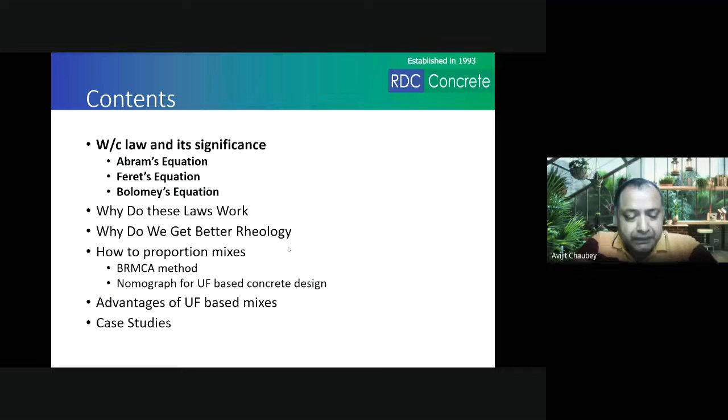Then why do we get better rheology with ultrafines? When we use ultrafine, why do we get better workability, lesser stickiness, a lower viscosity? And then how to proportion concrete mixes with ultrafine?

Of course, there is the IS method, there is the ACI method, but they have got limitations. Right now, the IS code or ACI method of mix design does not give a good and reliable method of designing a concrete mix with ultrafine minerals. So we will try to see what are the things to work around for proportioning concrete with ultrafine minerals.

Then we'll talk about the ultrafine based mixes advantages, and we'll see the real life case studies, where ultrafine material has been used to a very good advantage.

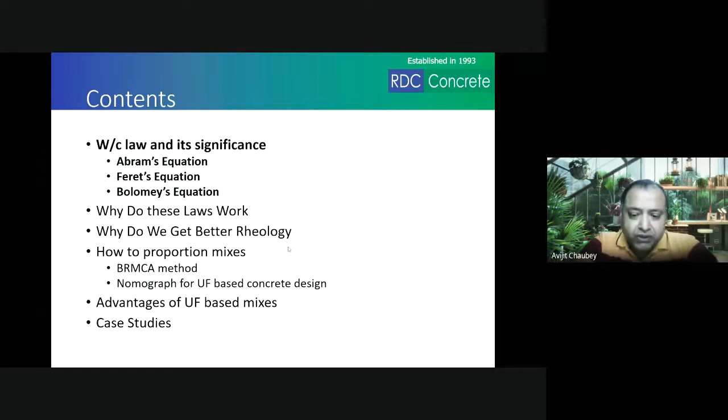So let us start with the water cement ratio law. In the year 1919, Duff Abrams, an American guy, did a lot of work. There were a lot of inputs. The strength was the output, and they tried to find out how to increase the strength, and through a lot of research he came across this relation that the strength of concrete is inversely proportional to water cement ratio.

Now, many people till today feel that the strength of concrete is dependent on the cement content - the more the cement content, the higher the strength. But in the year 1919, there was this person who focused on the strength of concrete, and he tested the strength of concrete by varying all the possible variables. And he said the only thing that affects the strength of concrete is the water cement ratio.

Believe me, I have tried to actually challenge this law. I have tried to change the aggregate proportions, because some people say that increasing 20 aggregate, you will get higher strength. Some people say if you increase 10 you get higher strength. Some people talk about other things. So I have personally tried to check whether this is actually universally applicable, and till today I have not been able to overcome this equation. Every time I end up getting that the highest significant factor for strength is the water cement ratio.

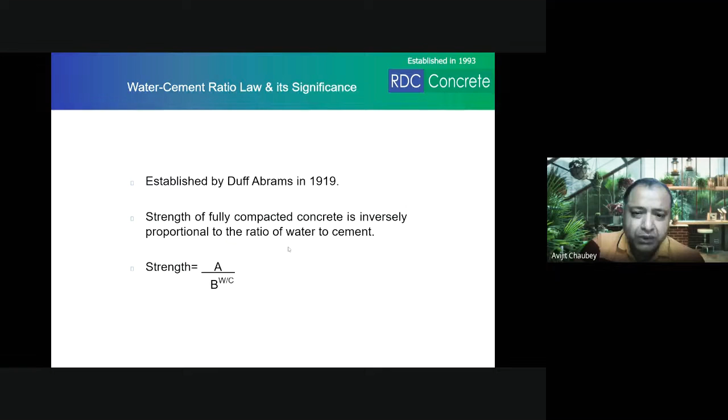They all did their work on gut feeling. There are cases where bridge construction used to happen in US and UK, and they never designed the structures. If you see traditional engineering, there was no calculation. People used to just start constructing buildings block after block, and the building used to stand, or else it used to fall down. American and British engineers were able to make very good, very strong structures, which are still standing today, without any calculation. It was just based on thumb rules and a very huge factor of safety. That is how it happened.

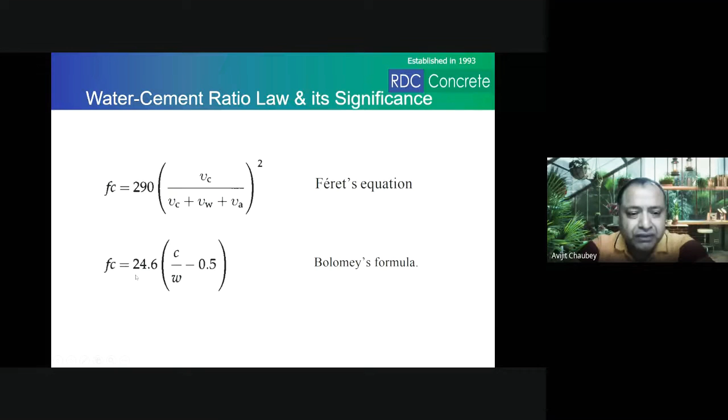He plotted the equation as per Féret's formula, Bolomey's formula, and Abrams formula for the same set of water cement ratio or mixes and their strength. All these equations actually fit the curve very well. The only thing he did was change these numbers to fit the equation as per his data, and that's how he did the curve fitting. Just by calibrating these numbers slightly, he was able to fit the curve, and it gives a very good data fitting, no matter which equation you follow.

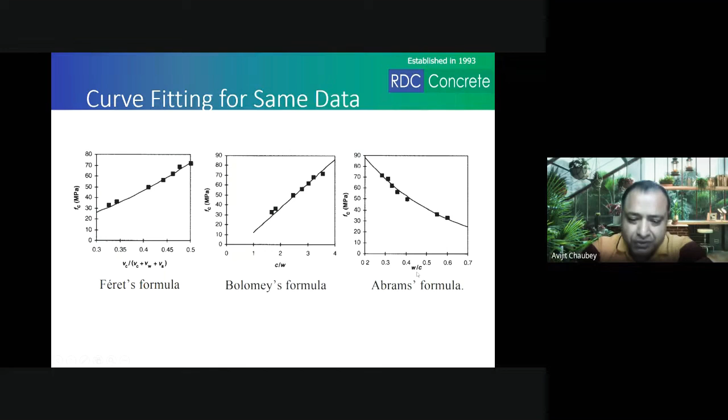Now, why do these laws work? Just excuse me a moment, please. I need to take this call. It's okay, fine. Thank you.

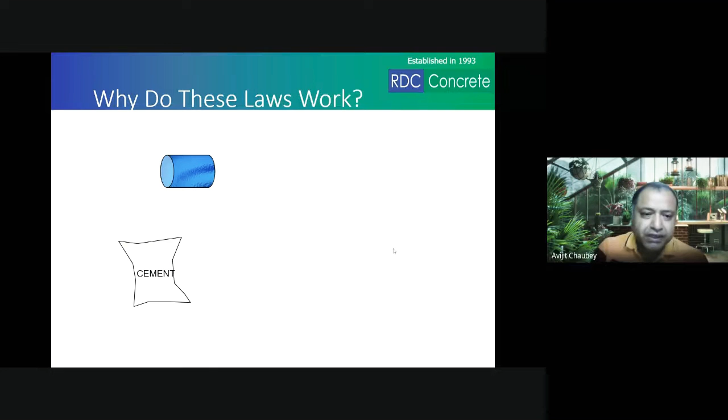So why do these laws work? As humans, we follow the law because the law is made that way. But in the world of science, it happens the other way around - the laws work because the materials behave that way. Let's see why. Say you have some clay, and you mix water into the clay to make a slurry or paste, and you get a cube made out of that clay.

Then you take a similar kind of clay with the same amount of water, but you add in more water. Similarly, in a third case, you add even more water to the same clay. Visually, the difference between these three pastes would be that the third one, with very high water content, would be lighter and less dense in color. The first one would be much darker.

Once this clay paste dries up and starts developing strength, it will show that the first mix is stiffer and the third mix is weaker, because the water molecules between the clay particles evaporate during hardening. These clay particles adjust themselves to incorporate the water particles amongst them, and you get a very porous structure where the water evaporates.

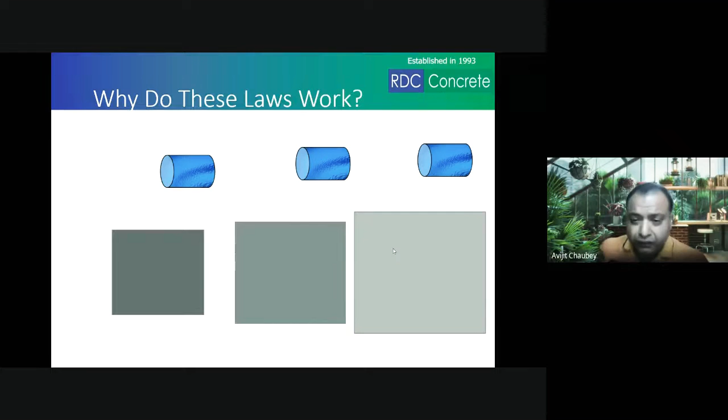Mathematically, per unit volume of all three materials, the water content would be highest in number three, and the clay or strength-giving solid material would be lowest in number three. The exact opposite would be number one, where the clay content is highest and water content is lowest. So this would be a stiffer mix, and when it dries up, it gives a higher strength.

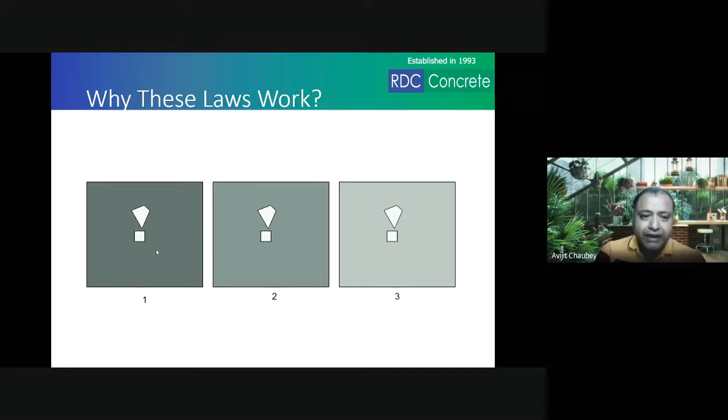Now when you add stone pieces into it - stone being aggregate, and we know aggregates are much stronger than any clay paste - when I add the same proportion of aggregate into all three clay and water mixtures, I would not get the same strength even though I'm putting the same stronger material in all three. The reason is the strength of a composite material is the strength of the weakest material inside it. Even though the first paste was strongest, and even after adding a much stronger material into it, the strength of the composite mixture still depends on the weakest material inside it, and that is the clay.

Hold on, please. Hello, boss. I am in a meeting. Can I call you after some time, please? It will take me 1 hour. Yeah, I'm sorry.

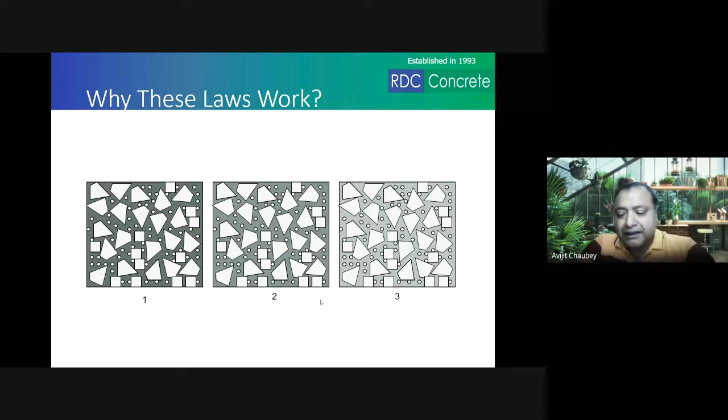So don't expect that you will get a strength higher than 100 MPa with the same materials that you are using. Now there is some other research also that has been done, and this photo is a very interesting one.

Now this test is a nano indentation test, and in a nano indentation test, they measure the strength of that material at a small point. It's a needle with a very small diameter, actually triangular in shape. What they do is prick this at different points inside the concrete and measure the strength of those points.

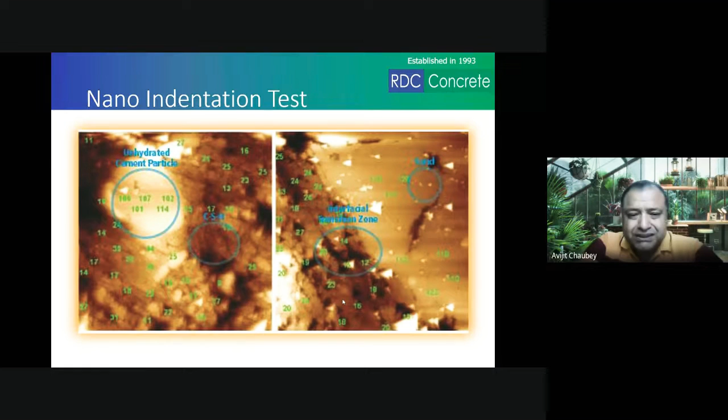I didn't say he slapped his wife. There are many different interpretations of this statement. The first interpretation is: I didn't say - someone else said. Rahul said, or Lakshmi said, that he hit his wife.

The second interpretation is, I didn't say he slapped his wife - I didn't do anything, I didn't do anything. I didn't - where you are stressing on the 'didn't'. I didn't say he slapped his wife.

The third interpretation is, I didn't say he slapped his wife - I actually wrote it down, or I was just thinking about it.

Then the fourth interpretation is, I didn't say he slapped his wife - I said she slapped his wife, or that other person slapped his wife. He is a good person, he does not slap his wife. It is actually some other person who slapped his wife.

The fifth interpretation is, I didn't say he slapped his wife, but he kicked his wife, or he kissed his wife, or did something else. He didn't slap, but he did something else.

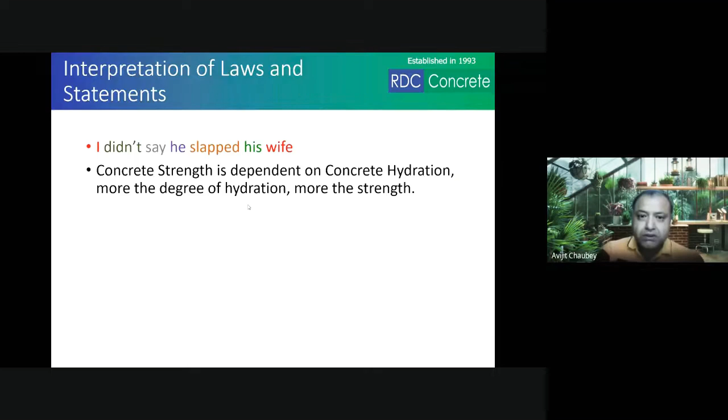Many a times people come across a situation where they don't know the strength of the cement. So how do you use this equation? Just do a trial with any water cement ratio - say 0.5 - make the concrete, find out its strength, and calibrate this equation. You will need to calibrate this equation.

And how do you calibrate this equation? You put the water cement ratio as 0.5, and in place of FT, just put the strength of concrete that you got. So let us say with 0.5 water cement ratio you got a strength of 25 MPa - put 25 over here, 0.5 over here, and find out the value of CS.

CS is the strength of cement. Now, once you have found out the strength of cement, you can predict the strength for other water cement ratios.

So you can plug in the CS value at the respective places, and whatever strength you want, let's say 35, you put 35, and if the cement strength you get is 58, you put 58 in all these places, then you'll be able to get the water cement ratio you require to get a strength of 35. Or you can do it vice versa: for the water cement ratio and that cement strength, you can calculate what strength you will get.

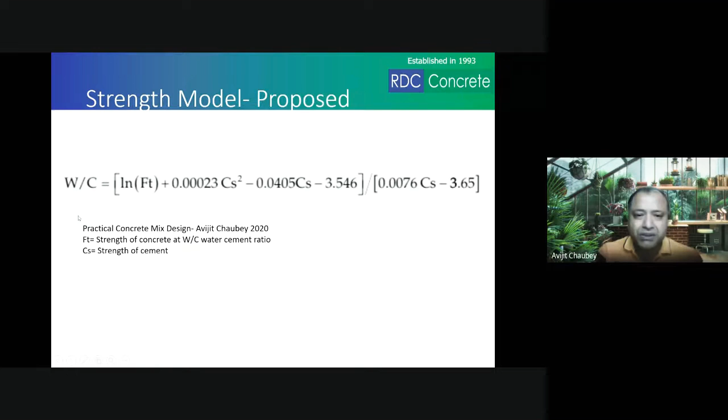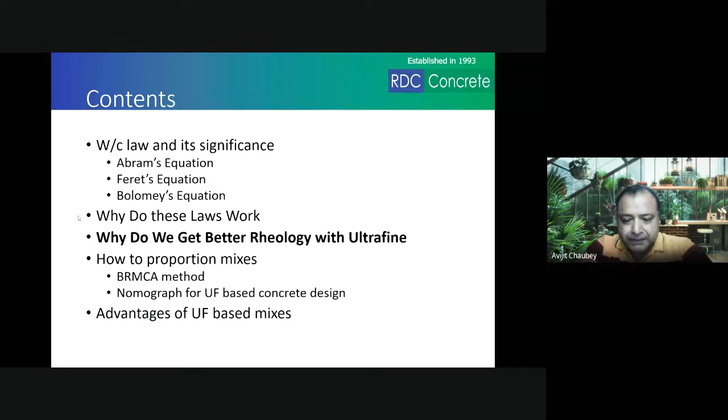Now, ultrafine materials basically give you many advantages. The first advantage is better rheology. Ultrafine materials give you better rheology compared to materials without ultrafine. And this is what has happened in modern science.

As I told you, François de Larrard has done a lot of studies in particle packing, and he has burst some of the myths in concrete technology.

The first myth in concrete technology is that uniform gradation of aggregates gives you good particle packing, which is absolutely wrong. In uniform particle packing, if you have a 20mm aggregate, the assumption was that the voids are 10mm in diameter, half the size. So all the sieves used for sieve analysis of aggregates are half in size: 20, then 10. Below 10 is 4.75, which is close to 5. Below 4.75 is 2.36, and so on. All of these are halved, and the proportions are such that each material has to be there. Many people get annoyed when they see some middle part of the material missing.

But if you see, without gap grading, you would not be making concrete even today. The concrete you're making today is actually gap graded. It may not be called gap graded with 20mm and sand, but with 10mm aggregate and sand, the middle portion is most of the time missing - 4.75mm - even with river sand. If you have a good river sand where 4.75 particles and 2.36 particles are also available in good quantity, the mix would turn out very harsh and porous. So a good sand is one where the top sizes are missing: 4.75 is missing, 2.36 is much lesser, and 10mm aggregate is more toward the 10mm size. So when you're putting 20, 10, and sand, most of the middle sized particles between 10 and sand are missing, and that is why you get good concrete.

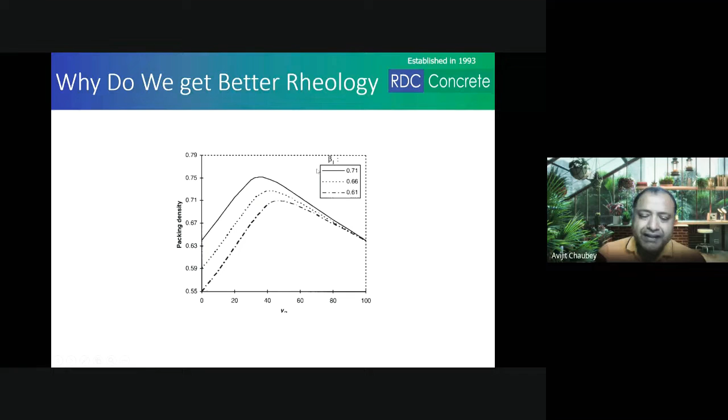He did a study with natural aggregates again. Beta 1 is the particle packing, the void content or packing density of each aggregate. It could be the same size aggregate, 20 on both sides, but beta 1 is the particle packing of the aggregate which is smaller in size compared to the standard one. So lesser particle packing means the aggregate is flaky.

Higher particle packing means the aggregate is less flaky, and the highest particle packing means it's not flaky at all - it's either spherical or cubical, a good shape. So when mixing flaky aggregate with a normal good aggregate, the flaky aggregate, even at its highest packing density, will be much less than the mixture with good particle packing.

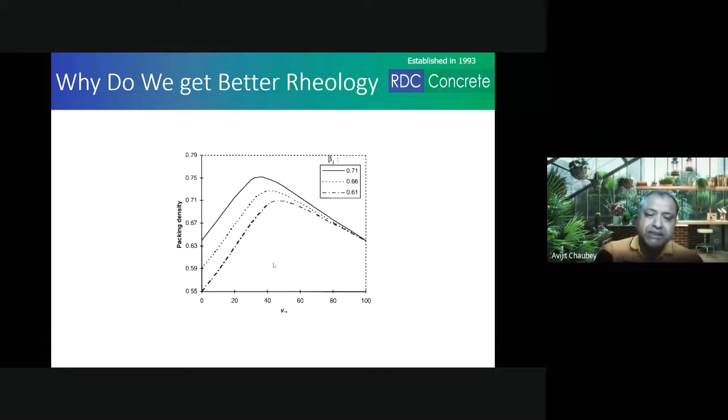So the first thing affecting particle packing is the proportion of sizes of aggregates being mixed together. The second thing is the packing density of the material - the quality of shape of those materials used for packing these aggregates together.

And the reason this works is because of two effects called the loosening effect and the wall effect. This wall effect is not necessarily closer to the cube surface, the cube wall, or the formwork structure. It can even be true against a bigger aggregate size.

So wall effect is - let's say if the aggregate was not here, another smaller aggregate could have come here where the wall effect is noted. Since this aggregate has come here, this point is left with void, because this wall has come, and this aggregate, not able to fit in this small gap, gets pushed away. This is called the wall effect, and it happens near bigger aggregates, near the structure or formwork.

The second thing is the loosening effect. This is where you put aggregates just half the size of the bigger aggregate, and the size of the void basically increases a little. Instead of getting better particle packing, you tend to get lesser particle packing.

A good effect happens when the aggregates have a dilation effect. Dilation effect is - if you put 20mm aggregate in a cylinder, the other material just flows between the aggregates when in loose condition, going inside and flowing through. If it doesn't go inside, it's not dilation - you have to mix it together, and after mixing you'll get a certain volume, which will be higher than the initial volume of the aggregate.

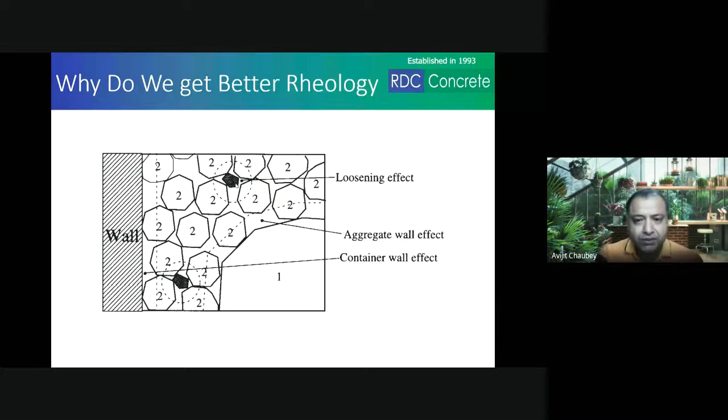This dilation effect happens only when you're putting much smaller particles. So for 20mm, if you put 10mm, it does not work. But for 20mm, if you're putting sand, the sand particles will easily flow between the aggregates and fill up the voids - you'll get a much better effect.

Now, the reason I've given you this explanation for aggregates, even though I'm speaking about ultrafine minerals, is because whatever is true for aggregates is actually true for fine materials as well.

When you're using cement with a very low water cement ratio, and the cement is not hydrating fully, there are many chances that voids would be left behind - capillary pores left behind the cement particles. These voids tend to give lesser strength. Even though the strength you measure may be 70 MPa or 60 MPa, the reason it isn't even more is because even after hydration, when the cement particle has grown in size, between these hydrated cement particles there are voids which are much weaker than the hydrated cement gel.

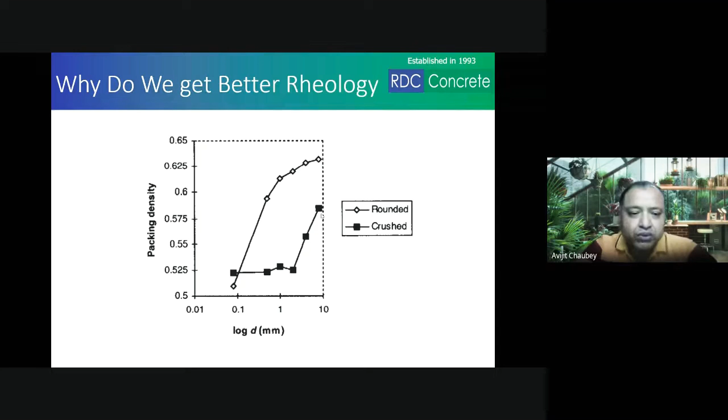And these voids need to be filled. So here comes the role of ultrafine minerals, where the packing starts happening and you get a denser matrix, where the cracks will not be able to pass through these voids, and you tend to get even more higher strength.

Now, how do you proportion these concretes? As per IS 10262, the new one, you have got three curves for different water cement ratios and strengths: 33, 43, 53. But what happens when you put ultrafine materials?

For the same water cement ratio, if you are using ultrafine minerals, you get higher strength. Let us say with just OPC, for 0.5 water cement ratio, you get 20 MPa or 25 MPa. If you replace some cement with ultrafine minerals, for the same water cement ratio of 0.5, instead of 25, you may get 30 MPa strength. And this happens for all the water cement ratios.

So how do you actually do it? The best method for proportioning concretes with ultrafine minerals is not the IS method, ACI method, or DOE method. The best method is the BRMCA method. Many of us would have come across this BRMCA method - some people call it the family of mixes method. BRMCA stands for British Ready Mix Concrete Association.

In the family of mixes method, you don't first decide what the strength is going to be. Basically, as per IS code, what we do is say, if you want M30, take this much water cement ratio, do a trial, and you'll get this much strength. And the strength usually comes somewhere around 41, 42, or instead of 38, it comes 35. Then we say, let's increase the cement a bit, and let us start supplying concrete. So that is not the correct method.

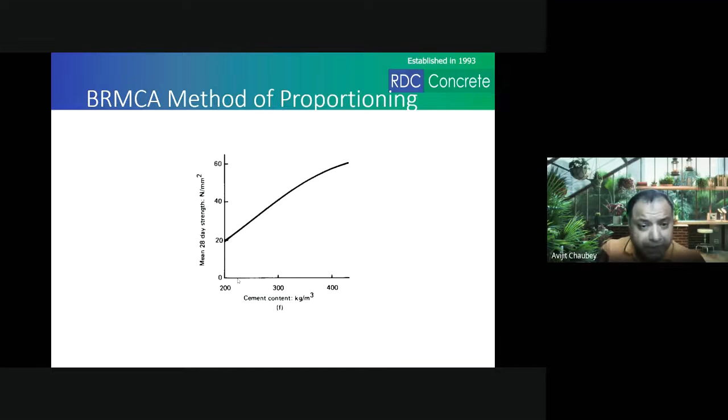One thing let me clarify: if you keep the same mix and just replace the cementitious with ultrafine, don't expect that you will get lesser stickiness. You will get lesser stickiness for the same strength when you are able to change the water cement ratio, when you're able to change the mix, when you're able to make use of the properties of ultrafine minerals. If you're able to utilize those properties, you will tend to get a better mix with better workability, better pumpability, and better strengths. You need to know how it behaves, and based on that you do your mix.

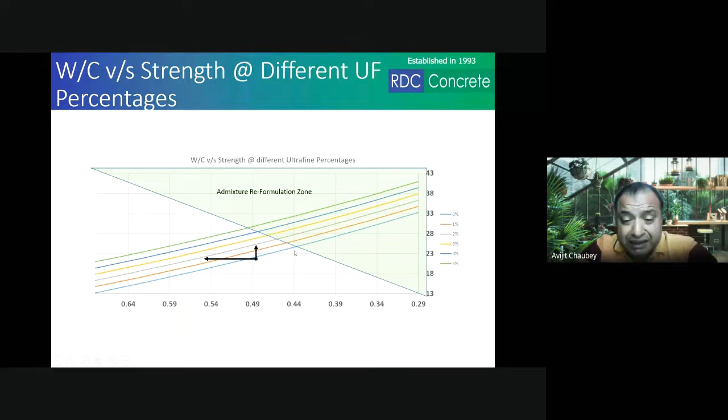Because as you keep going to higher and higher levels of ultrafine, it starts behaving like a lower water cement ratio concrete. Because for the same case without ultrafine, when you reduce the water cement ratio, you always change the admixture. You have mid PC, low PC, high PC. The reason you have high PC for higher strength is because the water cement ratio is lower, and you get higher strengths there.

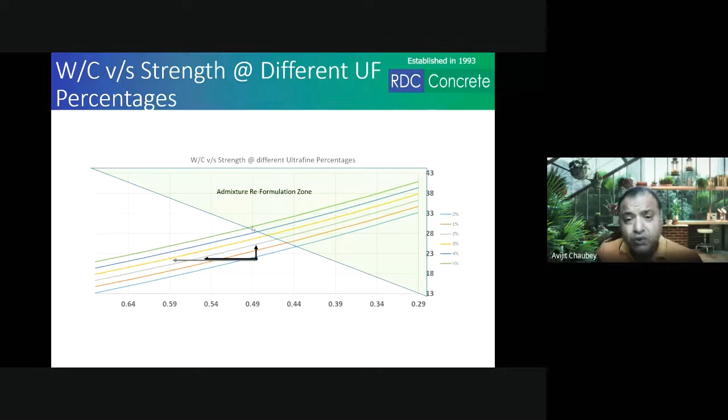So don't shy away. What will happen is, if you are making a concrete without ultrafine at, let's say, 0.49 water cement ratio, and then at 0.49 you want to use 5% ultrafine, that means at this point you will need to reformulate your admixture. You may need to go with a higher end PC, because these materials are much finer than cement particles, and you require a higher effort for dispersing them.

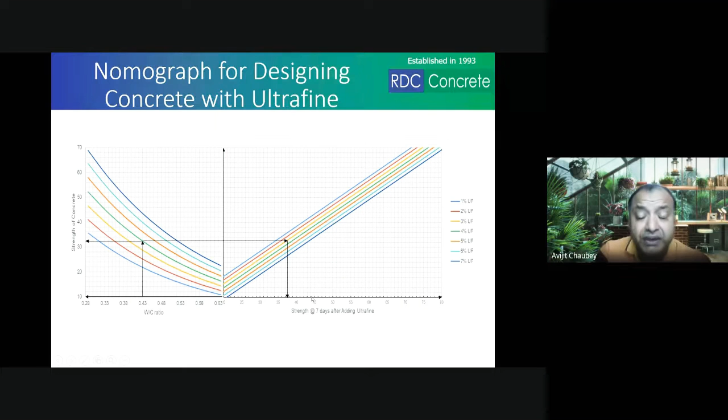Now instead of 32 MPa, you want to increase the strength to maybe 38. What you do is, from the same point at 0.43 water cement ratio, you plot a line till you come across 38 MPa or whatever strength you want. The point where this intersects is the percentage of ultrafine that you need to use. So at 0.43 water cement ratio and 3% ultrafine, with the same set of materials, instead of 32 MPa you will end up getting 37 to 38 MPa. And if you want even higher strength at the same water cement ratio, you can go with a higher percentage of ultrafine. Mind you, it may be required that you need to change or reformulate the admixture.

Now, what are the advantages of ultrafine based mixes? First is you get lesser water demand as compared to any other microsilica also. Till today, many of us were using higher strength concrete only with microsilica. But now many other materials have come, ultrafine slag, ultrafine fly ash, wherein you can incorporate this material at a better advantage if you understand it.

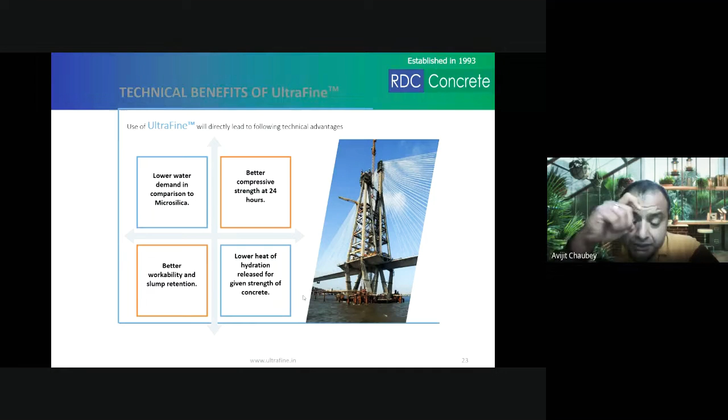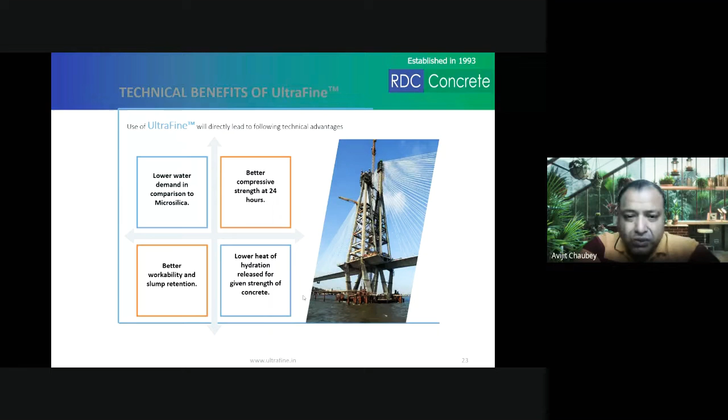Finer particles are good only if they are used to fill between the gaps. But if the gaps are much bigger and the particles are much smaller than the gaps between the bigger size aggregates or bigger size cement particles, then this will actually create a disadvantage. So it should not be too fine, but just fine, so that you are able to get good workability and strength.

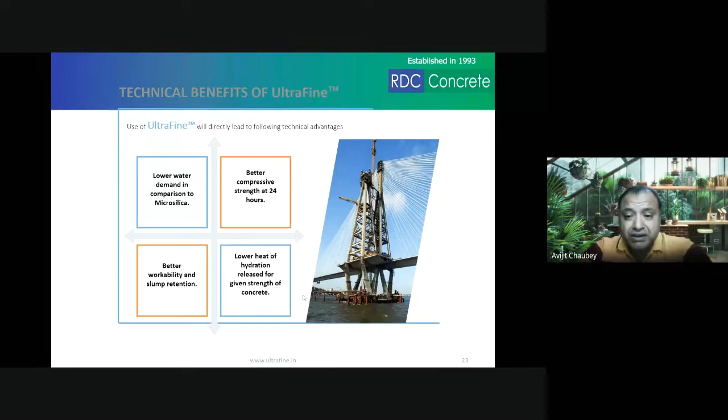Here you also get much better strength at 24 hours, better workability and slump retention, lower heat of hydration, and good strength of concrete. It has better resistance to sulfate attack, and reduced chloride penetration and migration test results.

Let me clarify one thing. One government body in Mumbai has now migrated from rapid chloride penetration test, RCPT, to RCMT, rapid chloride migration test. The reason being RCPT was a kind of wrong test because it was also measuring the current that flows through concrete. For example, you have concrete in this RCPT test assembly, and you are passing current through solutions of sodium hydroxide and sodium chloride.

The assumption was that when chlorides move across the concrete, the current flow will be higher. That's fine, but this current flow is much higher if you are incorporating steel fibers. If you put steel fiber in the concrete, it will start conducting current and you'll get higher coulomb readings, even though the concrete is not actually allowing chlorides to flow through.

Or even if you're not using steel, let's say you're using carbon, nanocarbon, or carbon particles, graphene or carbon nanotubes. These are also good conductors of electricity. So if you have carbon particles in the concrete, for example unburnt coal particles from fly ash, that will also lead to an increase in current.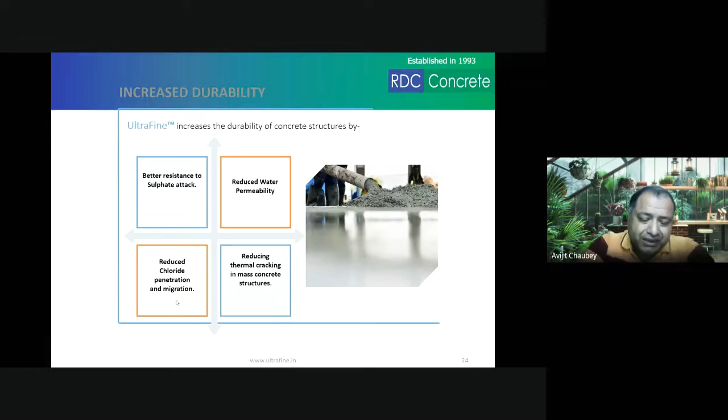This government body in Mumbai that incorporated RCMT gave a required value of 2 into 10 to the power minus 12. Trust me, they were not able to achieve that value at 28 days no matter what material they used. The only way to do this is to use ultrafine minerals, and we have been able to get at 28 days much less than 2 — somewhere around 1, and in some cases 0.7 into 10 to the power minus 12 per meter square. This is how you can incorporate these materials to get much better performance.

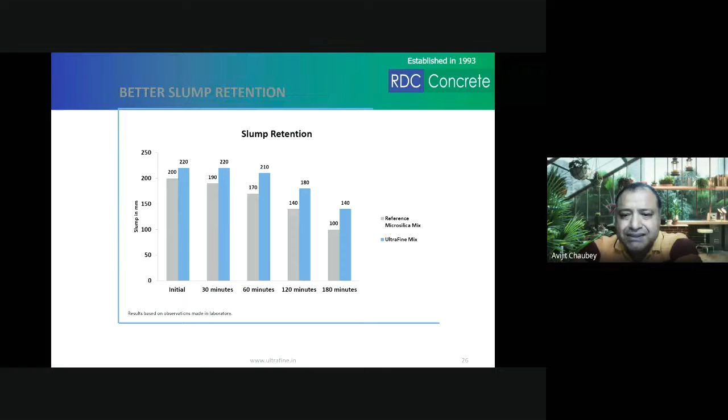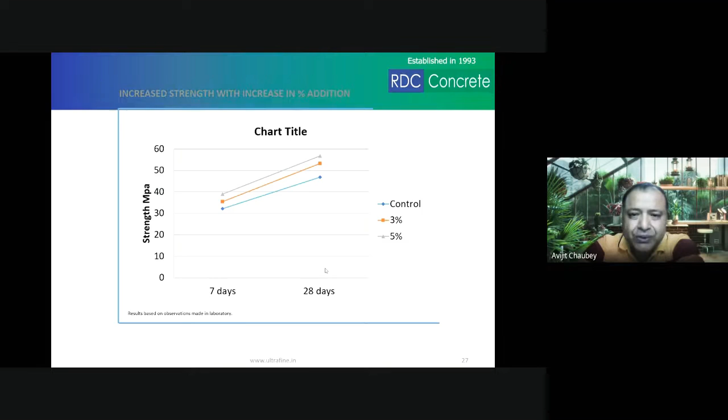If you see, these are reference mixes comparing microsilica and ultrafine. This is the retention graph — you get much better retention with the ultrafine mix. The blue one is ultrafine, the gray one is the microsilica mix. This shows strength relative to the control, and these are the actual strength values at 7 and 28 days. This is the RCPT test.

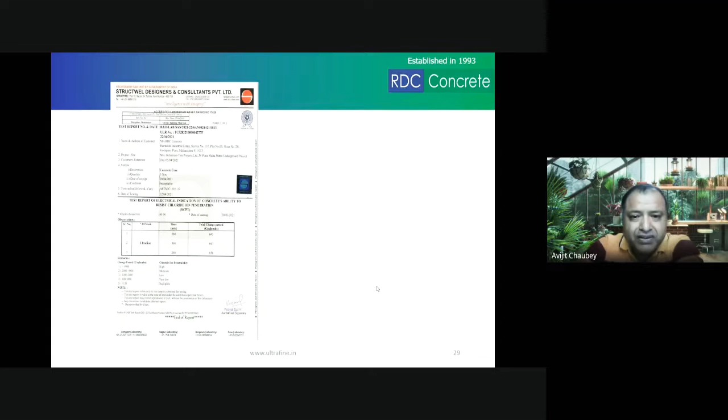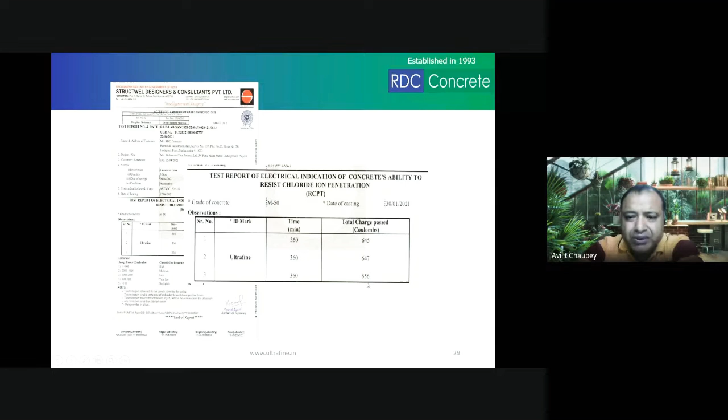Not just RCMT, even in the RCPT test you get much better performance when you incorporate ultrafine. These are results from a third-party structural lab. Here's a magnified view — the RCPT value we've been able to achieve is 645. This is the heat of hydration test we conducted.

Now, this is not for the same mix, but for the same strength at 28 days, so the mix composition differs between these two graphs. This is the control mix without ultrafine, and this is the mix with ultrafine at 3% dosage for the same strength. You can see the temperature is much lower compared to the control concrete.

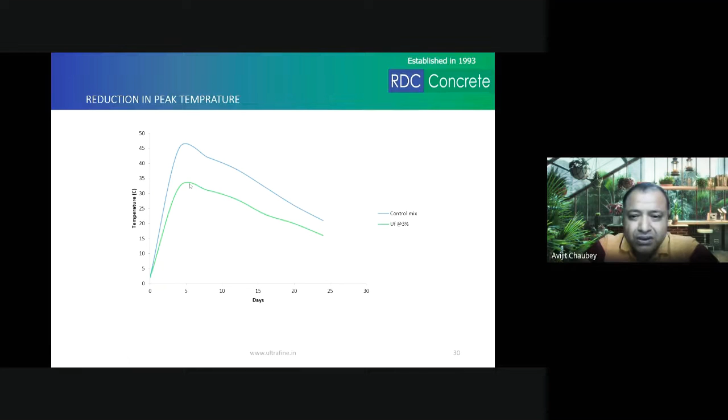Now, some case studies. This is the bullet train project trial we did. Their requirement was M50 grade for pre-stressed concrete. In one day, for M50 grade concrete, we were able to achieve 39.05 MPa using our ultrafine minerals. At 3 days for M50 grade, they got an average of 48.28 MPa, which was much better compared to the microsilica they were using earlier.

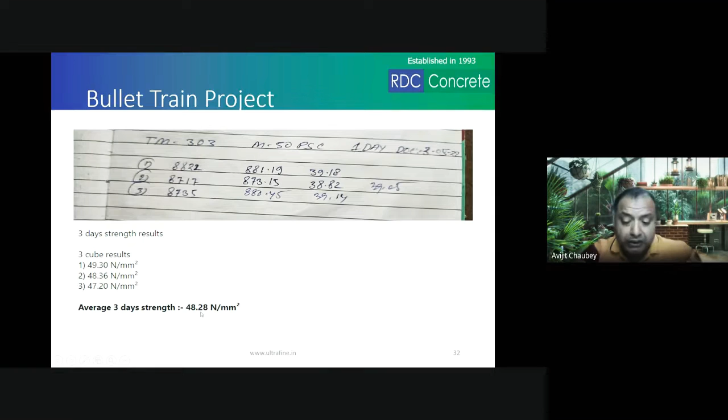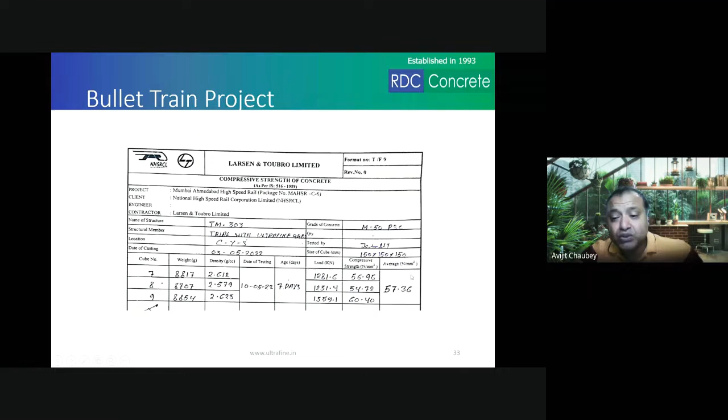They were kind enough to allow us to reproduce this sheet of theirs. At 7 days for M50, they got very close to the target strength, 57.36. This is what from their register we've been able to get at different days. At 14 days they've got 57, again almost the same.

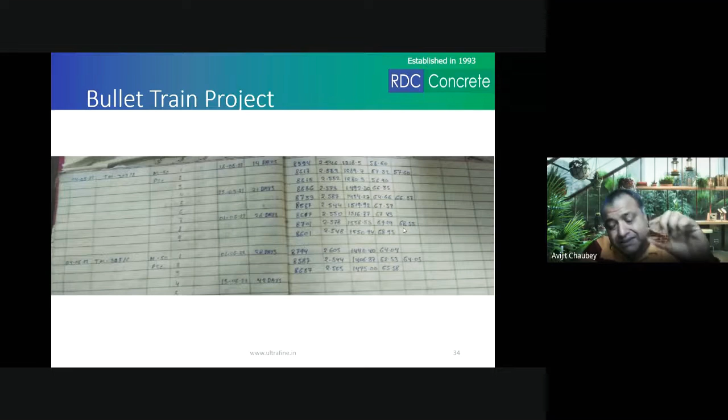21 days 66, and 28 days 68 for an M50 grade of concrete. Mind you, this strength was in addition to higher workability compared to their current mix. They were facing a lot of challenges in terms of bug holes in the sections they were casting for M50 grade concrete for the bullet train girders. They used to get a lot of cracks, also because it was mass concrete, and microsilica being very sticky, densified material. You require a lot of admixture to disperse it, and even after dispersing, the mix remains sticky, and also because it is much finer compared to ultrafine.

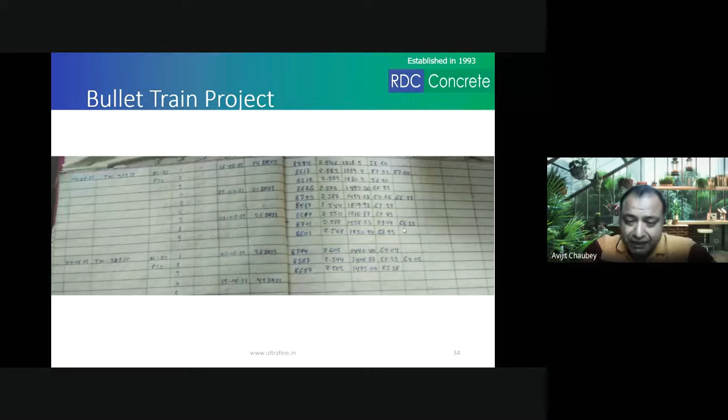So these materials have been able to give much higher strength with better workability and pumpability. Now, this, I'm sorry, the name has got hidden because I just copied and pasted from another slide. I did not realize that the name has got hidden.

This is Tata Projects M30 Ujjain, and they wanted a concrete design where the strength would be enough to open the traffic within one day. This was M30 grade of concrete, for M20, this was M20 grade of concrete. So in one day they wanted more than 20 MPa for traffic to open, and we incorporated 5% of ultrafine, and you see the entire mix.

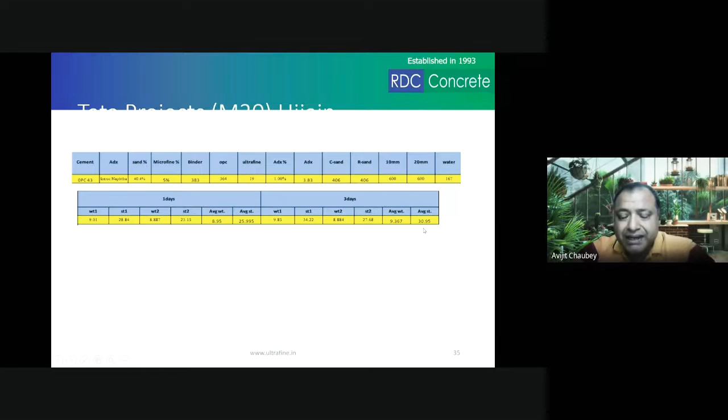They also allowed us to reproduce this mix. You see, with just one day strength, incorporating 5% ultrafine, they've been able to get 26 MPa for M20 grade concrete. At 3 days, 31, and so on.

Now this is another case study from Gujarat, where they have used ultrafine GGBS along with cement and fly ash, and they did this for reducing their cost of concrete. If you see M25, M30, and M35, this was a research work also. So they filled the cubes initially.

They filled cubes after 1 hour, after 2 hours, and they did the same thing for all the other cases. So if you see, the strength they get is higher for later age in all the cases. Initial concrete strength is much lesser.

So this is something beyond the ultrafine scope, this is the effect of mixing. The more amount of mixing gives you higher strength. So many people say, initial strength you'll get higher - no, initial strength you'll get lesser, but if you mix it for a longer time, you tend to get higher strength. This is because the energy you put into the mix to disperse the cement particles, so that all the cement particles hydrate, gives you definitely higher strength for higher amount of mixing.

Of course, this is the average that they got. They've calculated the average. But you see, this is how they have significantly been able to see that the strength is higher for higher amount of mixing time.

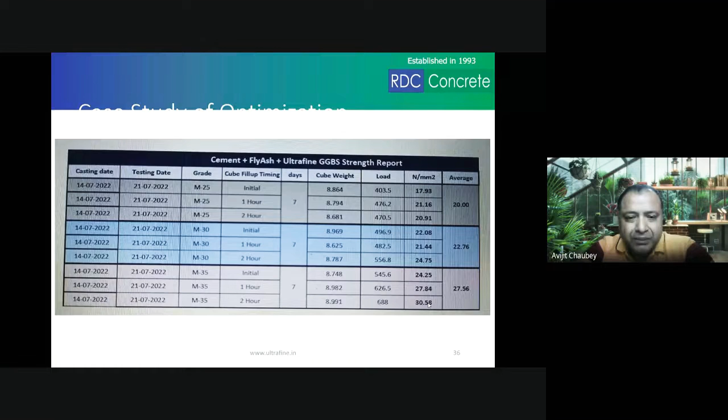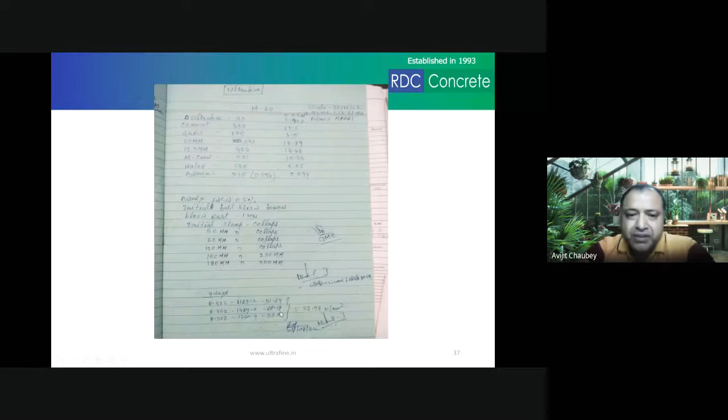This is another case from Gujarat. You see the top mix, the 7 days. Here they have been able to save a cost of 100 rupees per cubic meter to get the same strength for M25 and M30. And if you see, the strengths are almost the same. They have been able to get the required strength even though the cost of concrete has reduced by 100 rupees per cubic meter.

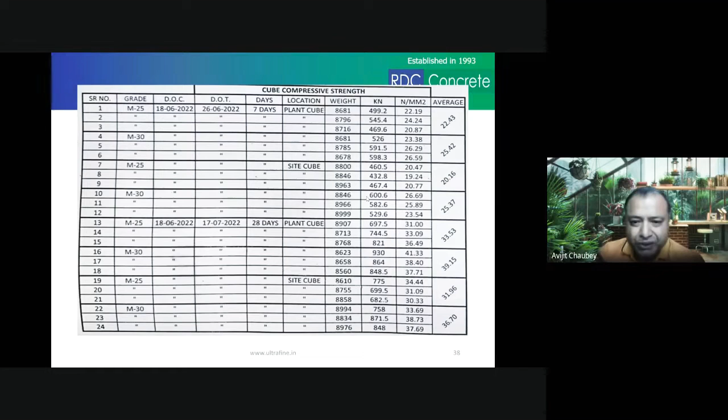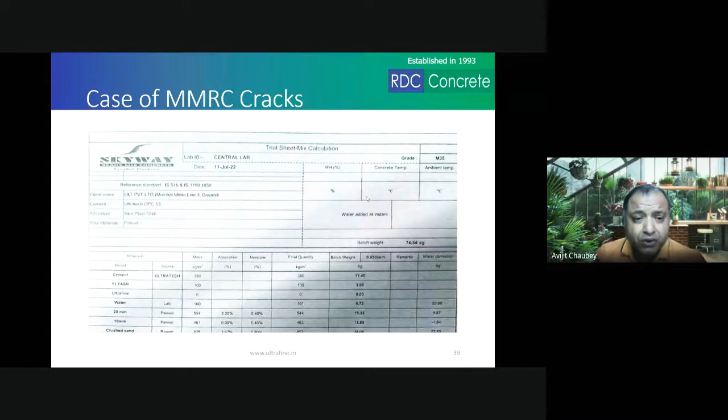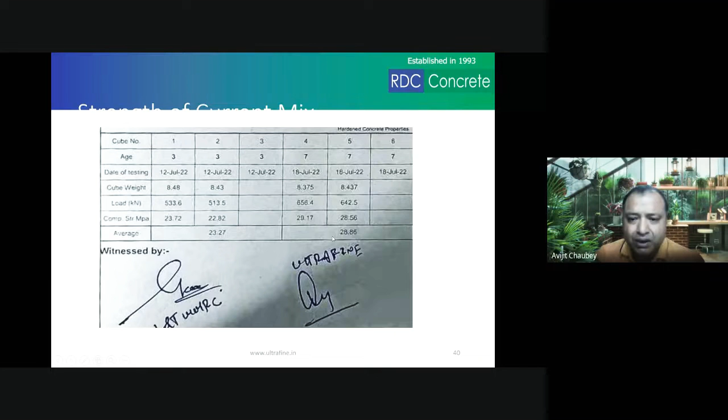This is from Skyway Central Lab for the concrete they supply for Mumbai Metro. If you see, this is without ultrafine. They get a strength of 23 MPa in 3 days and 28 or 29 MPa in 7 days without ultrafine, and the cement content is 380 kgs.

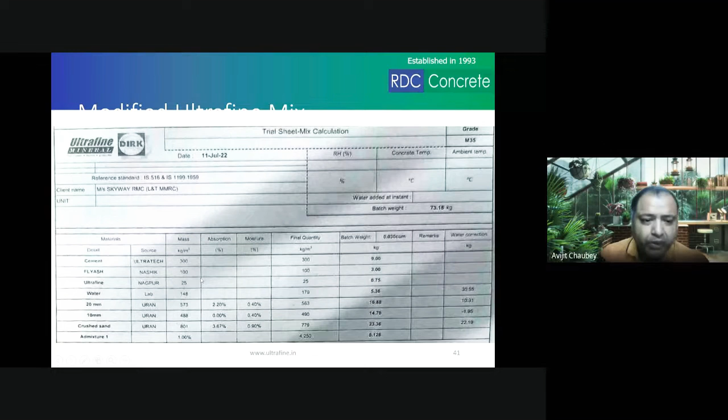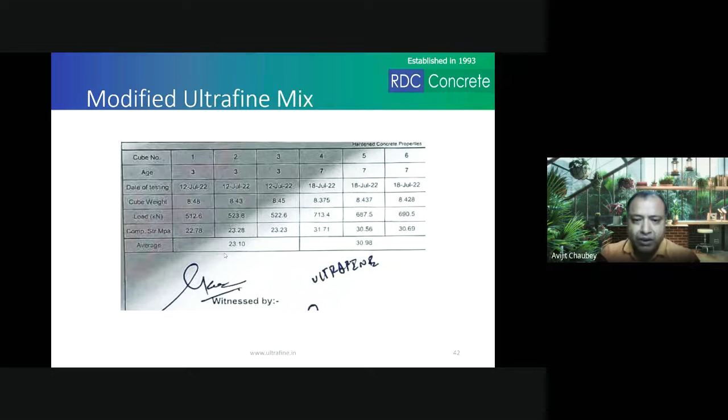Now, with ultrafine, the cement content was reduced to 300 kgs and 25 kg of ultrafine was incorporated. They were able to get 31 MPa in 7 days and 23 MPa in 3 days, almost the similar or better strength. But I would rather be humble and call it the same strength.

Now, this is a very interesting case. In Mumbai, an engineering college came up with a competition for the highest strength to weight ratio. They gave out this competition to all the colleges, and all the colleges participated. One college from Mumbai, Terna Engineering College, came to us. The professor is known to me, and she asked me for help.

We said, yes, surely we'll help. Why don't you use ultrafine? You will get much better results. There were two teams from their college, and both teams won first and second prize. These teams came to thank our team for helping them, and they came with bouquet flowers.

So the numbers they got - the strength to weight ratio for the first group was 13, and the second group got about 12 point something. The third group, from some other college, was getting 5, 4, that kind of strength to weight ratio. So you see, even incorporating ultrafine, you can get this kind of benefit.

Basically in engineering design, the main challenge is strength to weight ratio. The biggest load for any structure is its own weight. So when you're able to make concrete with a higher strength to weight ratio, the structure becomes more and more efficient. You will be able to make more structure out of the same materials. So that is it from my side. Over to you.